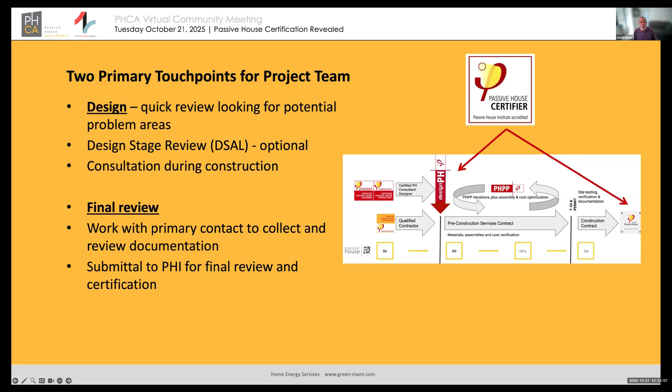Now, they reserve the right to review that final package - they may or may not do that. That's in our contract, that's an option. It happens sometimes. Other times you send them a submittal package and it's fine, here's your certificate. So you never know what's going to happen, but that could be part of the process.

Let's talk about the big lift, the documentation requirements. There are basically six categories here. If you want to find out more, download these two links - one is the building criteria, this is what you have to do in order to get a certified project. The second, the Passipedia document, gives example documents - these are submittal requirements.

Question from Vincent: Am I more involved at the design stage for remodels, for example to provide pre-certification? No, not really. Most of my projects are new construction - I've got a couple of remodels I'm doing, and the amount of involvement as a certifier is about the same. It's not a big difference, really. My remodel experience is limited - maybe 1 in 10 projects is a remodel. I'm doing 2 retrofits right now, maybe 3, maybe 4 - I have to go back and look at my project list. So yes, I am doing some.

Okay, documentation. I'm going to go through this. There's the documentation, there's the modeling plus auxiliary calculations, specifications, a bunch of MEP stuff, construction photos, and testing and commissioning reports. Those are the categories of things you need to submit to a certifier.

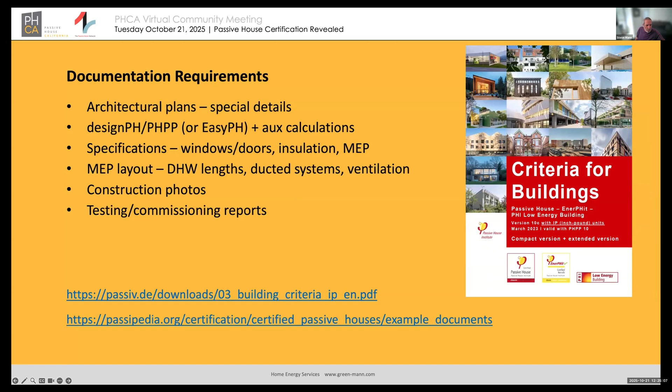Architectural plans. The site plan has to have certain elements, and again these samples I'm showing are from this second document here, the Passipedia document. You don't need to study these slides, there's more information in the Passipedia document, and I'd recommend you download it and read it.

You have to have a true north designation. You have to show neighboring buildings. You have to show shading obstructions and an outlining of the building highlighted.

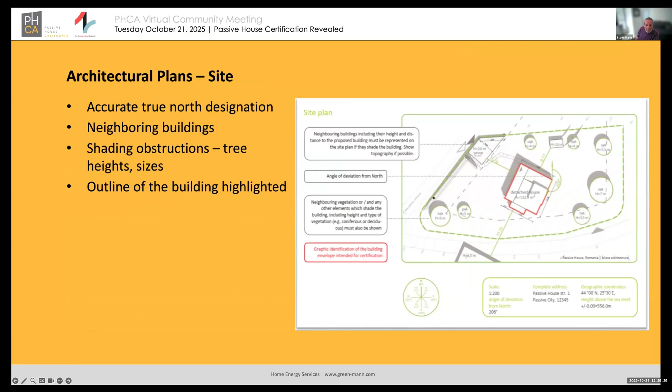For the floor plans, you need to outline the thermal envelope and the air barrier, and we typically recommend you do it in separate colors and identify them. This is just one sample. We would like to see dimensions for the thermal barrier because that's really what we measure when we're certifying a building, and that's what the consultant should be measuring. Sometimes you get that, sometimes you don't. As a certifier, you learn to deal with it.

The other thing we want to see is a treated floor area that's highlighted. Treated floor area is an interesting little art and science all to itself. You just have to figure out how to do it. I'm not going to delve into it any more than that.

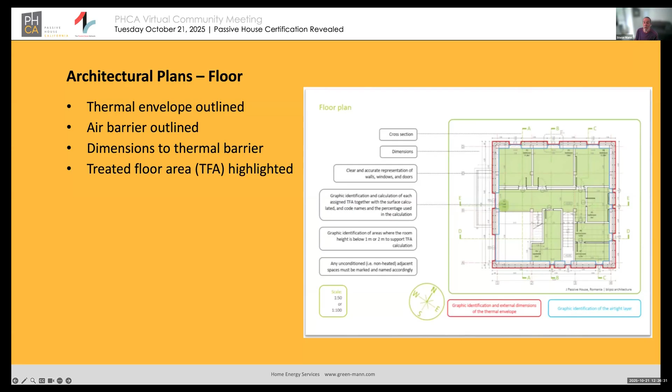But we need a clear representation of what the treated floor area calculations are. We don't want to do those ourselves, the consultant or somebody needs to do that and make it clear, because all of the calculations in the PHPP, or virtually all of them, rely on an accurate treated floor area number. So that's got to be right on 99 to 100% accurate, and we check that very closely.

On the sections, same things. We want the thermal barrier and the air barrier outlined. We want materials listed - this can come up on the sections or it can come up on the details, and I'll show you details in a minute. Again, dimensions of the thermal barrier. We want to see materials here that match the materials in the details.

If I see you identify, say, rock wool insulation on the outside in a section, but then in the details you call out plant-based material of some kind, it's clear to me that somebody's not keeping stuff up to date, and I don't know what you actually built. To me, that's a red flag that says somebody's not keeping track of stuff or taking care of business. So I'm going to look at things a lot more carefully because it's an indication of sloppy work. I want the materials to match all the way through.

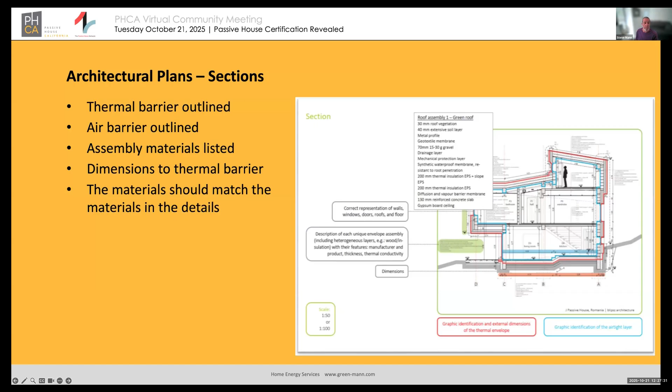Here's a sample of some details. We need to see details again with the thermal and air barriers marked, the materials called out, dimensions, especially on door and window.

Details, we want to see reveal dimensions because they have a significant effect - they can have a significant effect on your solar radiation. And again, the materials in the details should match the materials in the sections, and as I'll see later on, the materials in the specifications.

Mark, is this level of detail required for all projects, including infill? It seems like although this level of detail is required, it's a major barrier to scaling passive house.

Good question, Mark. It actually is a bit of a barrier initially. It is required because we need to know exactly what's in the building, in all places.

What I found is once a project team, and especially a passive house consultant or an architect, if they're working together, once they've done this a few times, they develop a set of templates, a set of standard details. It's just like structural engineers - you get a set of structural plans, 2 plan sheets that are project specific, and then a 3rd plan sheet that is basically boilerplate stuff that may or may not totally apply. The architects that I work with and that I like working with are the ones that know how to do this, and it doesn't present a great burden to them.

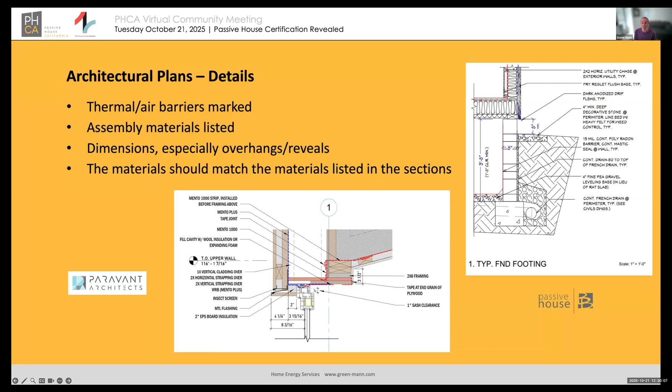What I do go to window manufacturers for are U-frame values and glazing specifications, that kind of stuff. But I don't think they're in a position to provide installation details like shown here on the screen. If you can get them to do it, great, but it has to match what's actually done, and the chances of that happening are pretty limited, I'd say.

Okay, the nerdy stuff. We need a PHPP - that's the core numerical crunch document. It's got to be complete, error-free, including the plausibility check. For the Passive House nerds who know about PHPP, there's a check worksheet that contains errors. If there's no errors there, that's great.

But there's a secondary section called a plausibility check that has additional commentary generated automatically, and somebody has to address those comments - things like questions about massing, or a large or small percentage of windows. That needs to be addressed in order to get through certification.

You need a clear, accurate treated floor area calculation, a clear volume calculation, and in many cases a ventilation design, which for single family is actually quite easy to do. A lot of my architects do that, and as a consultant, I do that too.

I encourage architects, designers, or somebody on the project team to submit this stuff in a clearly readable format. Here on the bottom is a treated floor area calculation, volume calculation, and ventilation calculation all in one worksheet - clear, accurate, brilliant. It makes my life easy. I like to see that supported by floor plans that are color-coded to match this schedule if possible.

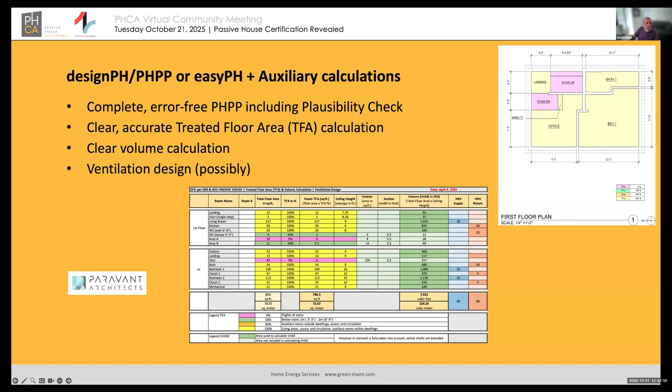Shading detail. Shading can be a real pain, unless you're in the plains of Kansas with nothing surrounding you at all. Generally, I have to go get shading information from the project team. The site plan should have some stuff, but generally it's not that accurate, and it won't contain all the information you need.

I need to see tree heights and the breadth of the tree envelope. So I usually ask the project team to go out, take photos, measure the heights, put together a worksheet, and ideally put it into designPH.

For my money, designPH is the only way to do accurate shading. I'm at the point where I pretty much will not certify a project without a designPH model, because there's just too much extra work involved, both for the nerd doing the number crunching and for me as the certifier. It especially has to do with things like terrain - there's really no good way to do terrain accurately with a secondary spreadsheet or something like that. It just doesn't work.

This is my personal opinion. Okay.

There is a BC Canada book. Haven't seen it, don't look at it. It might actually apply, but to my mind every project is different, so the details are always different. If a project team pulls stuff from a detailed book, great, they can refer that to me and they've got the information. But I've never had that experience. Every project team does things differently in my personal experience.

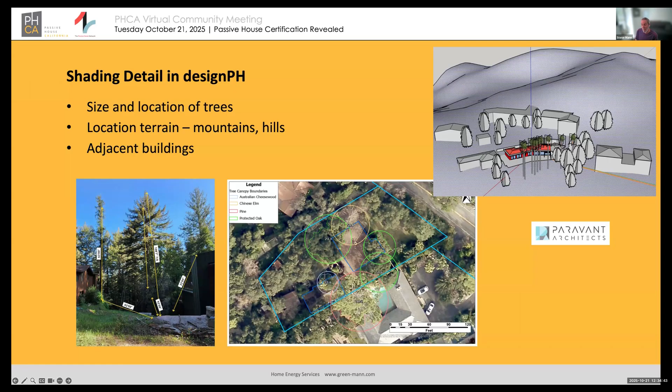Thermal bridge calculations - you could talk about books for thermal bridge calculations too. In theory they are out there and you can pull from them, but I've never had a project team do that either, because every project is unique as well.

I encourage the team to put together a thermal bridge booklet where they identify all the thermal bridges, tied back to the project details on the plan sheets. That's going to be thermal bridges plus door and window installations, plus building intersections, change of insulation layers, any place where there's a potential thermal bridge. I like to see a catalog, and then depending on the nature of the thermal bridges, I ask them to tie those to a set of thermal bridge calculations.

Ideally, the best thing to do is a thermal bridge free design, which is possible. In fact I've had several teams that have been able to do that. You have to go into the project and schematic design thinking, I'm going to do a thermal bridge free design, and that sort of comes out of it.

I'd say that's maybe a quarter of the projects that I've done. Other than that, you do need to identify thermal bridges, document them, calculate them, and this could require a third party to calculate those. There aren't a lot of people that do thermal bridge calculations and do them correctly.

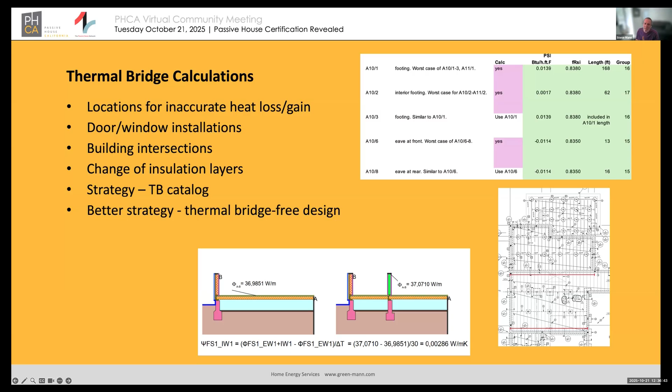I'll leave the CEC commentary alone and not talk about the book - I've never looked at that book. Oh actually, yes, I have looked at that book. I have it and I recommend it to all my clients. It's got some generic details, but again they don't apply to everything. It's good guidance though.

Doors and windows, we need complete specifications. We need a schedule on the plans. We need a window order and/or shop drawings. We need...

consistent identifications and sizes. When I say I'm an auditor, I'd like to see a clear audit trail from the elevations to the project door and window schedules, to the shop drawings, to what's in the PHPP, to what's in the designPH. And I'd like to see people use the same identifiers for every one of those, so that if I see something in the shop drawings, I can go find it in the PHPP easily because it has the same name.

This is not hard to do. It requires thinking about it while you're putting all this stuff together, starting with design and then all the way through project delivery.

Some window manufacturers actually pull window IDs from the plans. They're my best friends because they make my life easy. Some of them don't. I'm going to look for this information, and if it's not there, somebody on the project team is going to have to provide it to me.

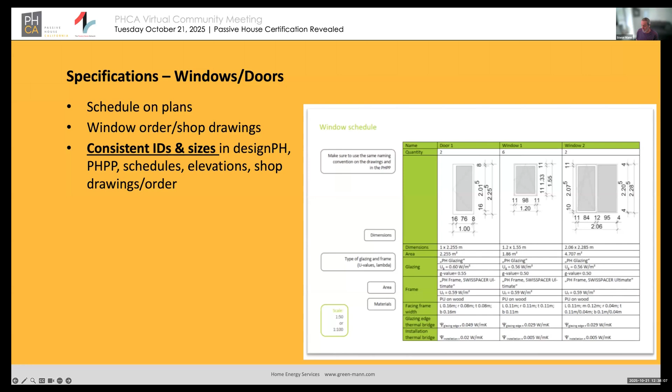We need glazing specifications, frame U-values, PHI certifications if there are any, and PSI install values if they're needed - and generally they're going to be needed. PHI is getting stricter about those.

NFRC numbers don't count. In California, the California Energy Commission requires you to use NFRC window and door values for energy code calculations. I oftentimes have window manufacturers send those to me, or project teams send those to me, and I respond saying, nope, they're irrelevant, I need more details. Then I tell them what's needed. Oftentimes the window manufacturers do have some of this stuff, and eventually they provide all of it, or somebody provides all of it, but it's got to be very, very complete.

What's different about thermal bridge evaluation for California? Nothing. Why couldn't we use the BC numbers? You can, if they match the project and if they're calculated properly. And is there a directory of thermal bridge calculators?

By that, do you mean people that do that, or software that does it? If you mean software, there's really only 3 products that do that. Flixo is the most popular one, Therm is the second most popular one, and there's a third product.

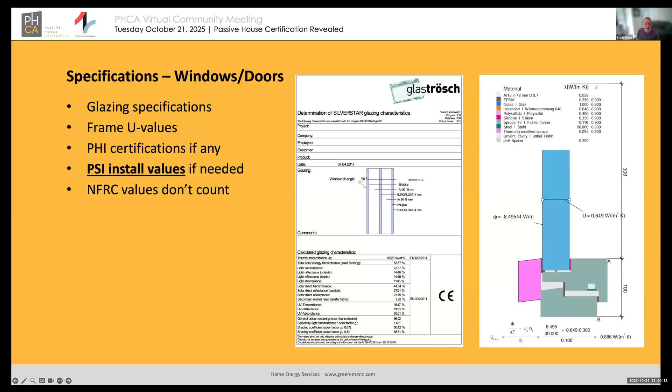Very detailed specifications on doors and windows. For installation, we need to know exactly what's being installed.

Okay, Robert. PH Canada offers calculations, and so does Passive House Institute if you want to go with them. I've used them on one project, they do fine work. I've never used PH Canada.

For installation, we need a summary of what's installed, stuff called out on the details, and specifications for each installation product, either a certification report like ICC, or legitimate, well thought out specifications showing the R values. The materials in the details need to match the specifications you provide, and match the pictures of the installation delivered on site. We need a clean, clear audit trail from concept through to execution.

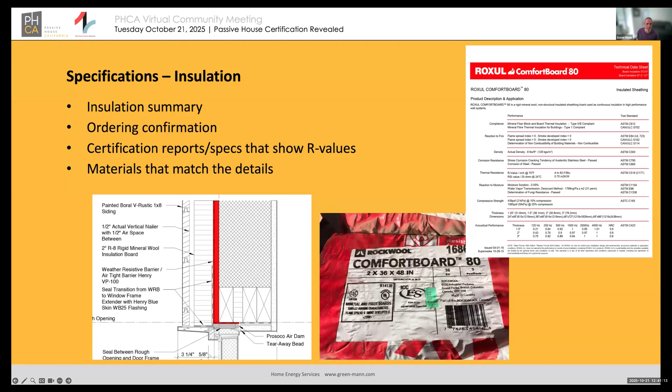Mechanical needs similar depth. We need all the hardware specifications, PHI certifications if they exist (which they probably will for the ventilation equipment), a ventilation layout, a domestic hot water layout with pipe length calculations, and if you have ducted heating and cooling systems, the duct layouts.

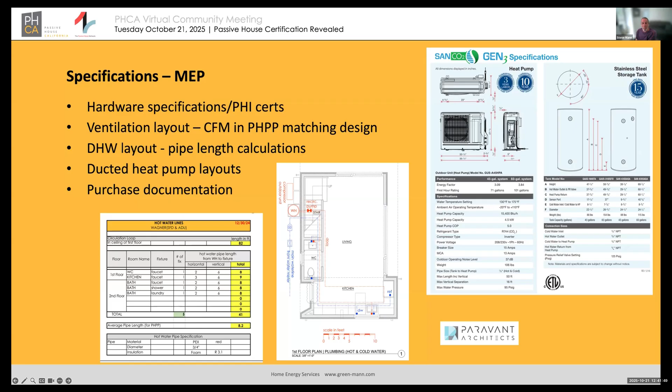We need purchase documentation showing that yes, you installed this hot water heater—here's the purchase documentation—and in the photos we want to see a picture of that same piece of equipment.

Then for the builders, we need construction photos. Here's a link to an official PHI list of construction photos. Every certifier has a different way of approaching this, I know from experience—some are more complicated, some are less. If you use this official list, you should be in pretty good condition.

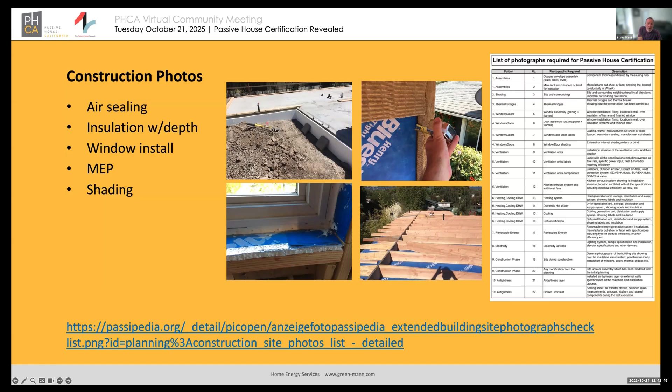Essentially we're looking for photos of the air sealing details, insulation details with rulers showing the depth of insulation, window installation, mechanical installation, and shading obstructions. For shading, this means surrounding shading—an official requirement is photos of the building surroundings taken from the building surfaces outward, so we can double check the shading information previously seen in the modeling.

Testing and commissioning reports: we need a blower door test done using ISO 9972 method 1—nothing else is acceptable. We need an official signed report confirming the ISO method was used, showing the calculations and all of that.

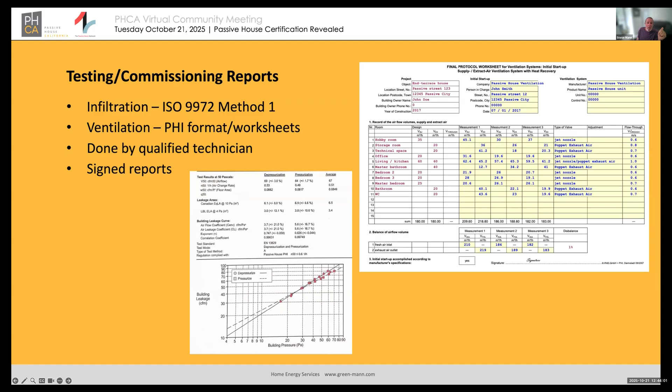For ventilation, we need a signed ventilation report by somebody. There's no such thing as a certified ventilation technician—well, we can slice and dice that—but anybody who has the equipment and is qualified to do these measurements can do it. I've had Passive House designers do ventilation commissioning, California HERS raters do blower door testing, and people who just have the equipment do blower door testing. As long as they know what they're doing and can clearly show that, it's okay. There's no written qualifications required, but the reports have to be signed by whoever did them.

So this is the quick and dirty version—this is everything you have to do. And like I said, there are nuances I haven't really touched on; they come up once you dig into a project.

So if you want to make this as simple as possible, here are a few recommendations—this is my personal take. Everybody's different, every certifier is different, every project's different.

This is what I like to see: one point of contact. That doesn't mean I won't talk to the other project members, but I'd like to have one person generally responsible for delivering the documentation to me. It can be the designer, the architect, the nerd, the consultant, or a secondary team member, I don't care. I just don't want extended conversations with 5 or 6 people about the documentation. It's not an effective use of anybody's time.

I would encourage you to ask the certifier how they want the data delivered. Some people like to set up drop boxes, that's my preferred method. Some people just like to have documents sent by email, I'm okay with that. Some clients like to set up their own Dropbox and manage it on their end. I prefer to do it on my end, but I'm open to suggestions. We need to have that conversation to make sure that whatever method we agree on, we're going to use.

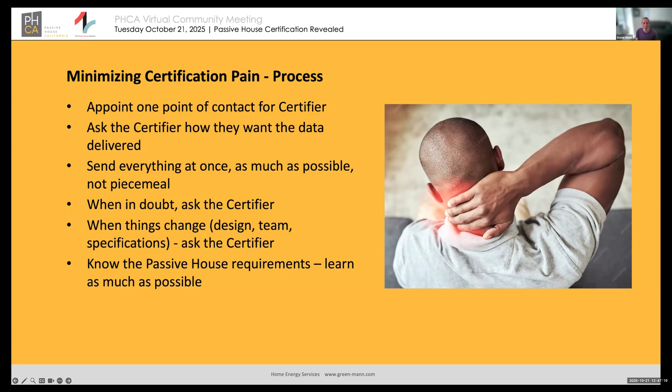Ideally, everybody should know the passive house requirements, the links I put in the previous slides about the certification requirements, the documentation requirements, those kinds of things. I would encourage certainly the consultant or the nerd to know that stuff. It's great if the architect knows that stuff. The builder and the subs, maybe not so much, but the more educated all the team members are, the better. It works to everybody's benefit.

In terms of documents, keep everything up to date. Everything. Please, please, please, don't send me a set of architectural drawings that were done 9 months ago and then a designPH that was done 2 months ago, and they don't match. If they don't match, I'm going to just send them back to you and say these don't match, fix it. It's much easier for everybody if you make sure everything's up to date and in sync ahead of time.

I already mentioned I'm going to need to see an error-free PHPP or EasyPH, and the check worksheet and the plausibility check comments have to be addressed. All the documentation for the certification guide, which I just blasted through quickly, and I'm certainly happy to talk about those requirements. Your consultant should be familiar with those as well.

This is one of the biggest ones: consistency across everything. I'd like to see a clear audit trail for everything. Treated floor area, clear audit trail, clear documentation, so I don't have to dig around and say okay, well how did you calculate that? You show me how you calculate it. I talked about window IDs all the way through everything, I'd like them to be the same, that really makes my life so much easier. Naming conventions, same deal. If you call something rock wool on your details, that's great, don't call it mineral wool in your PHPP, but call it rock wool. Be specific.

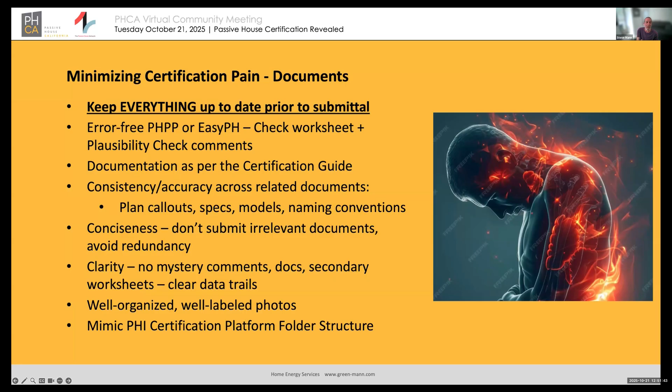In terms of all the documentation as it gets sent to me, it's great if it mimics the certification platform, if we're using that, which I prefer to use. Certification platform is an online thing that Passive House Institute does, and it has 10 categories of documentation requirements. This gets set up by the certifier if the certifier wants to use this, or the project team wants to use this. You don't have to use this, but it's a great organizing tool. I didn't used to use this so much, but the more certifications I do, the more I use this for an organizing principle.

I can set it up. I can upload documents to it. The consultant can upload documents to it. We have to negotiate who's going to do that. I prefer to do that, but the official consultant can too. I can actually assign multiple people that can put stuff in here, but I'm not going to do that - I want one point of contact.